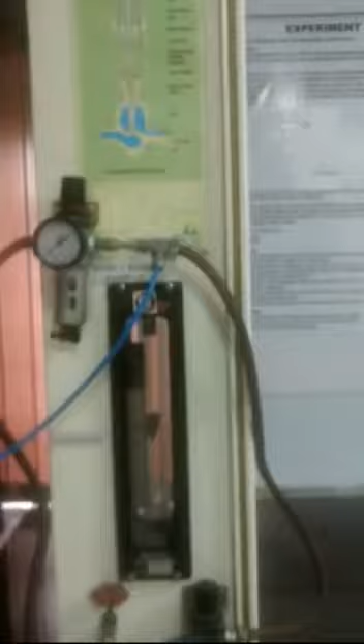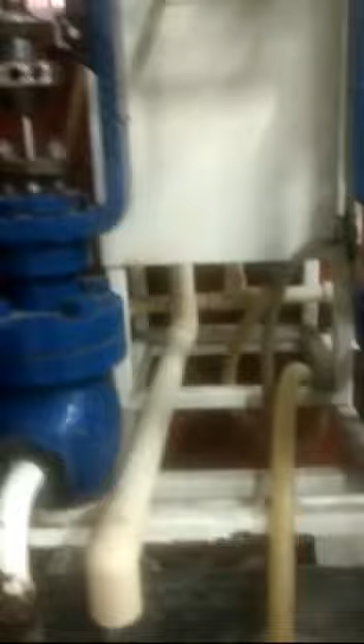Calibration of diaphragm control valves. Objective: to study and calibrate diaphragm control valves. Apparatus: air to open valve, air to close valve, air compressor.

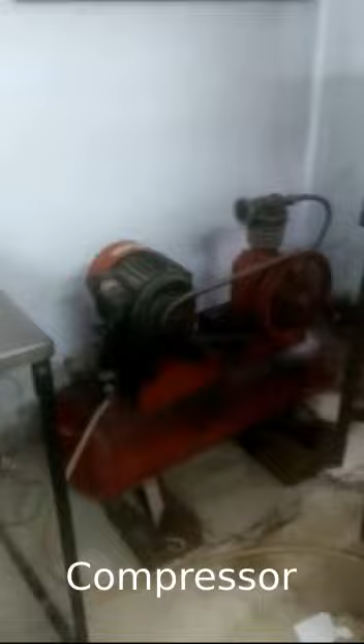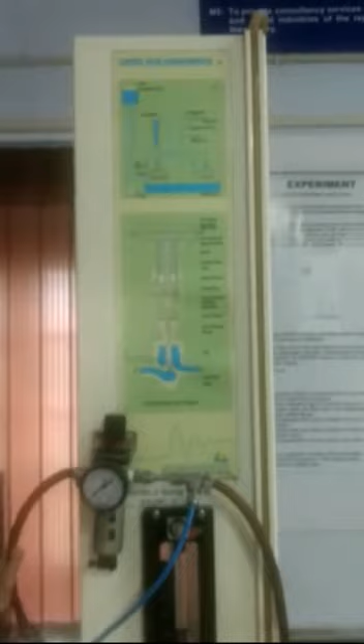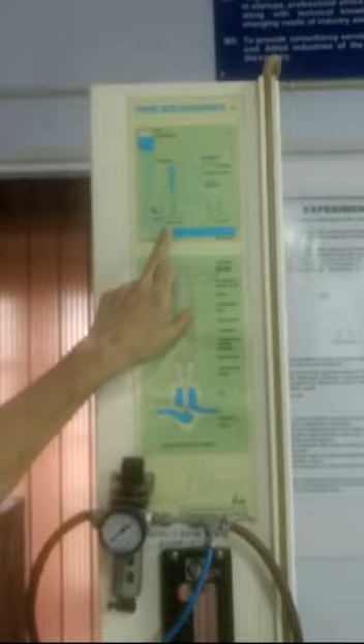So normally there are two types of control valve. One is pressure to open and one is pressure to close. So if you see over here, this is a schematic diagram. This is the tank and here are the two valves. One is air to close and one is air to open. This is a tank, you can see it over here. This is the output side to have a constant head over here.

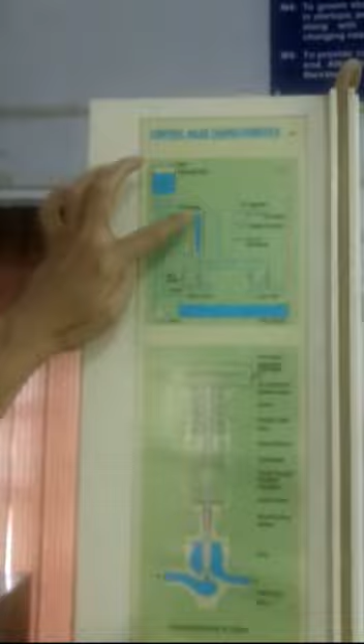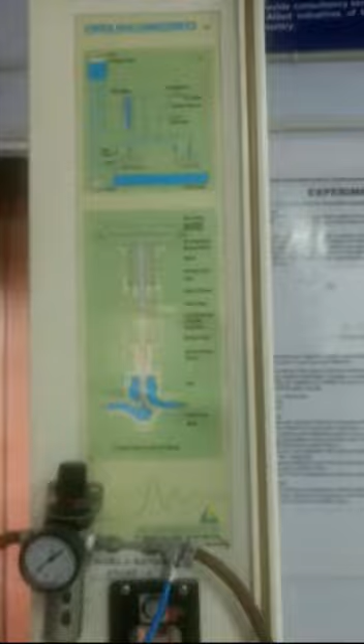And you have the rotameter. From this rotameter the fluid is coming over there and it is going to this valve as well as this valve. So we go for the operation of one valve at a time. Now this you can see is the internal structure of your control valve. This is your diaphragm and this is the stem, and you can see over here the input and output, and this is the nozzle which is used to close it.

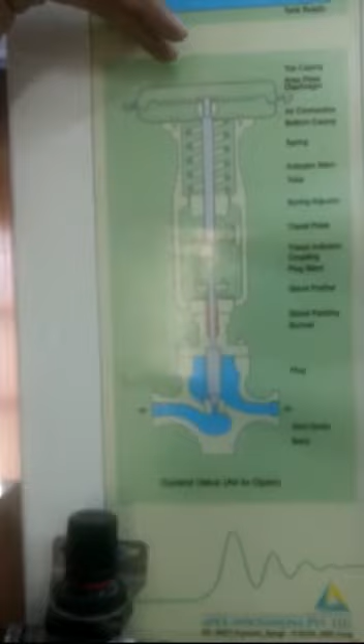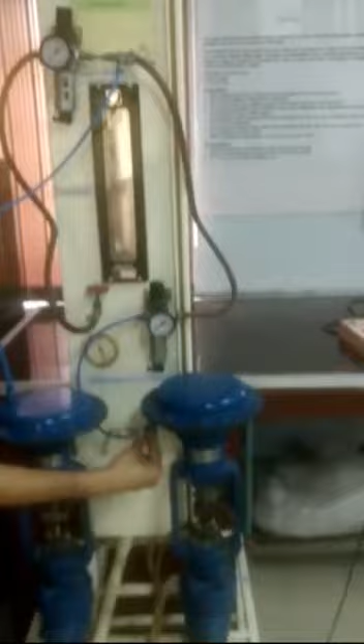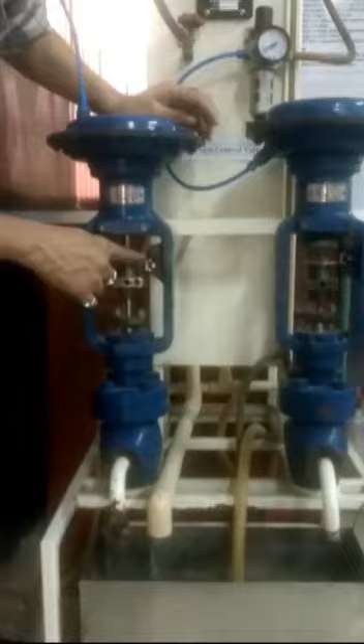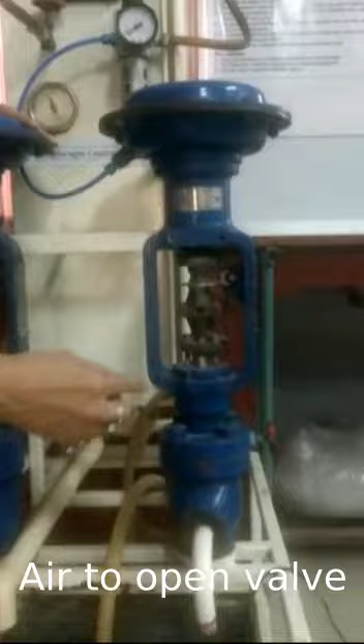So when no pressure is applied, this is an open valve and you can see that the water is coming out of here. When we apply the pressure, you will see that this will move and it will come to shutoff. Similarly, in this valve we are applying the pressure from here. So in the normal case, it is in shut mode and this is the air to open. Now I am going to put pressure over here.

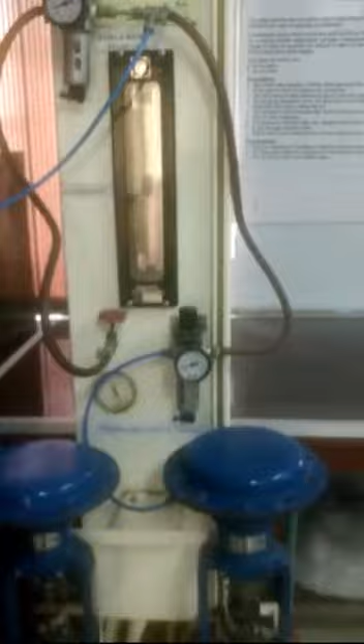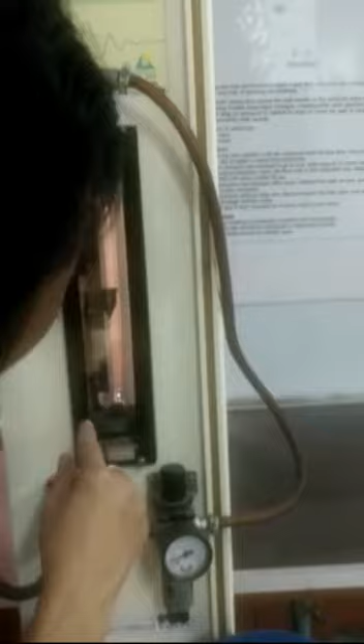And with this pressure, here the flow rate that we have put is 250. It is 250 per hour. So now when we apply the pressure, this will move from open to shut and the flow rate will decrease. So now you can see.

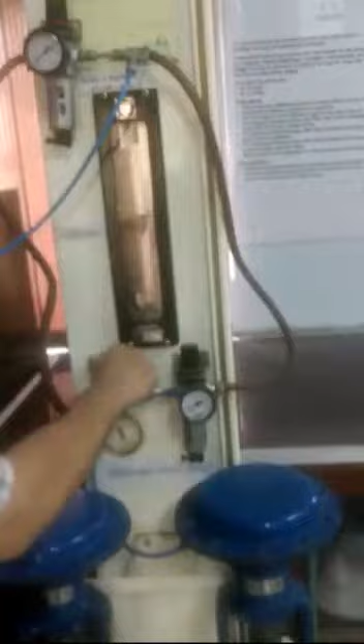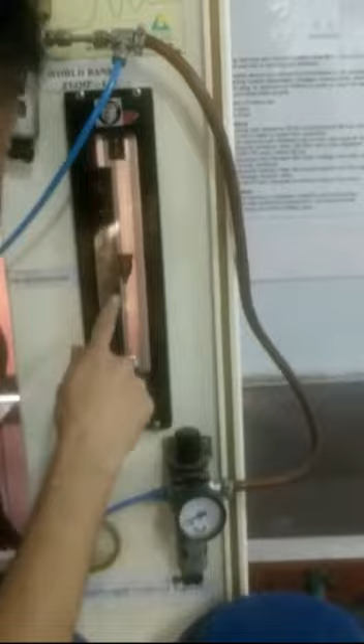Taking readings for the air to close valve. We will start when there is no pressure in the valve, that is the pressure is 0, and in this condition the valve is fully open. We will note down the flow rate. The valve is in fully open condition, so the stem will show its maximum reading. Now pressure will be increased to a fixed amount, and in our case we have increased it to 2 psi.

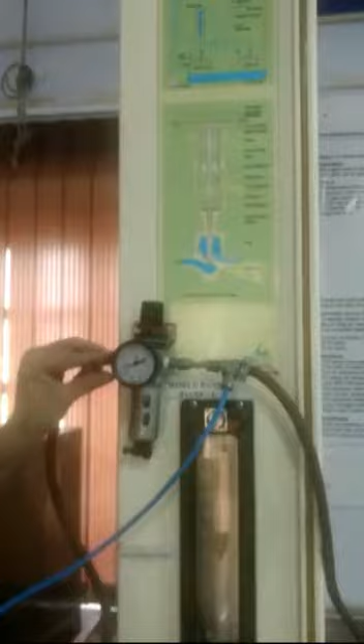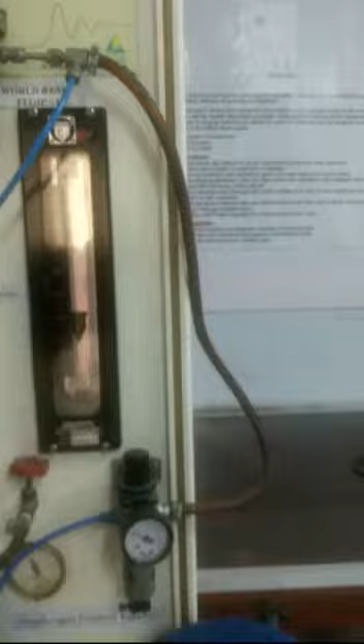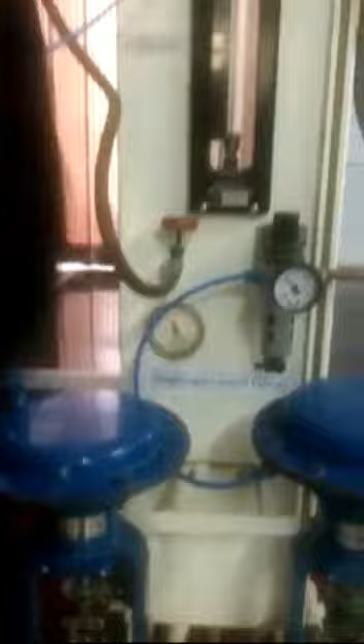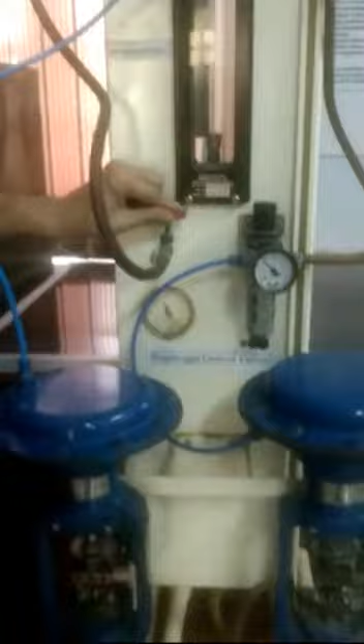When pressure is increased, the stem changes its position and flow rate decreases, and we will note down the stem position and the flow rate. Same way we go on increasing the pressure by 2 psi each time. We go like this until the pressure becomes maximum, and with each increase we note down the stem position and the flow rate.

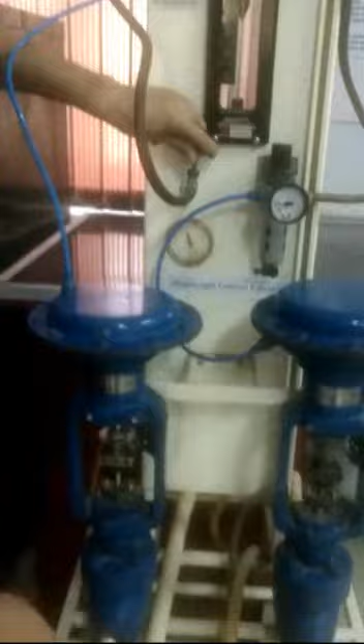And then we release the pressure by the pressure releasing valve, and this time too we decrease the pressure in steps. Each time we decrease the pressure by 2 psi, and each time we note down the rotameter reading and the stem position.

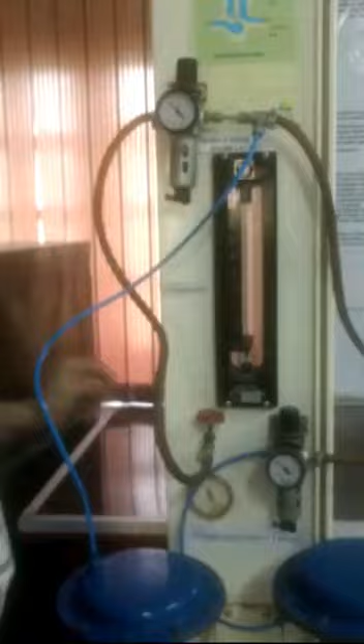Taking readings for the air to open valve. Here also the procedure is the same as previous. We will take the reading when there is no pressure in the valve, the stem position and the rotameter reading, and then we will increase the pressure by 2 psi, and then we will note down the rotameter reading for flow rate and the stem position.

And then again we will increase the pressure by 2 psi, and again note down the stem position and the flow rate, and then we will decrease the pressure in the valve with the help of the pressure reducing valve, and every time we will decrease the pressure by 2 psi, and each time we will note down the flow rate reading and the stem position reading. Here are some sample readings from our experiment.